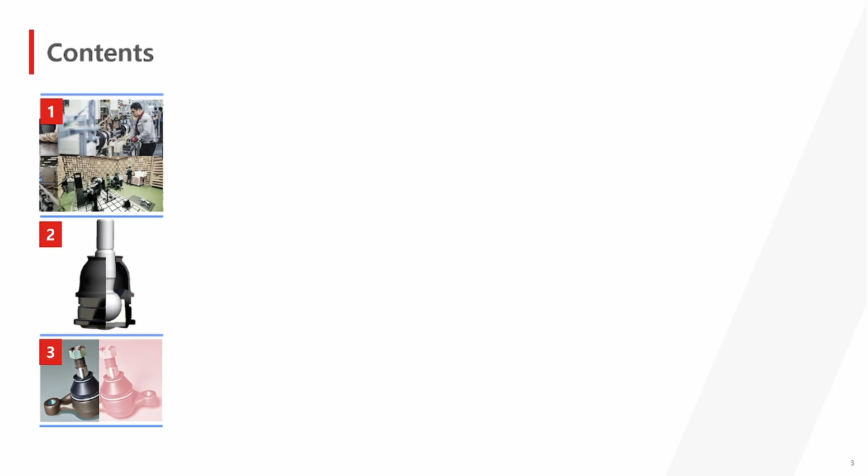Here is a summary of the main topics. First, I will tell you about the CTR aftermarket R&D development capability. Second, I will share CTR aftermarket product features and know-how. And I will share results comparing with competitor products.

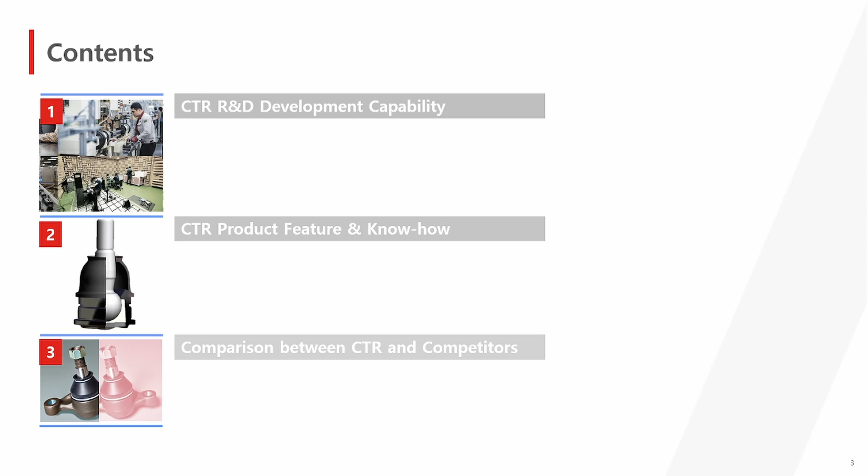Are you ready to begin? Then let's start the first tech seminar in Oman. First is CTR aftermarket R&D development capability.

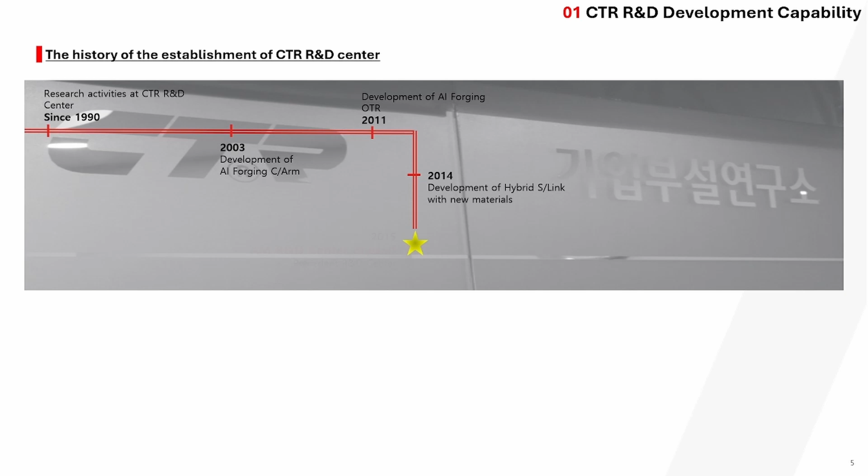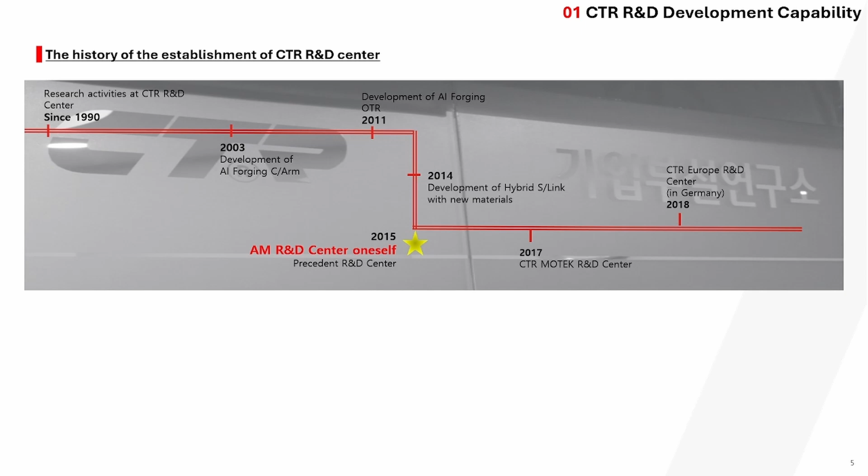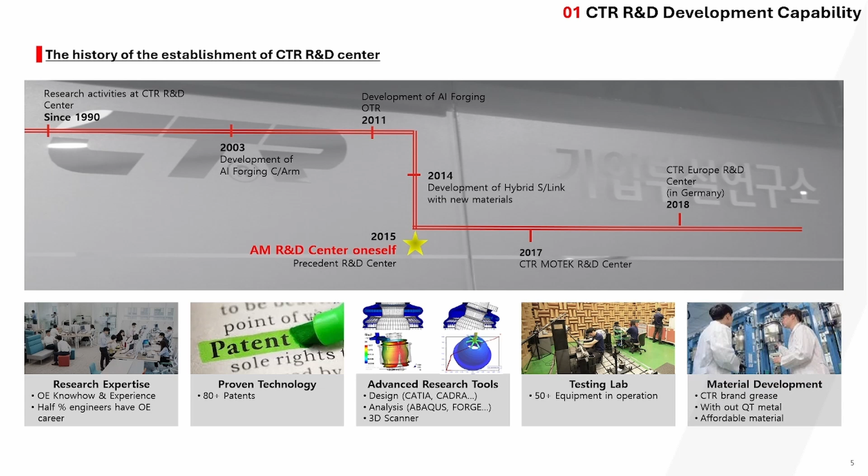CTR started with research activities in the CTR R&D Center since 1990. We have achieved some important technology developments. And since the establishment of the R&D Center for the Aftermarket in 2015, we have been training specialized professionals for the aftermarket. In the aftermarket R&D Center, we possess research expertise, proven technology, advanced research tools, a test lab, and material development capability. In the aftermarket, CTR stands alone as the world's sole company with such R&D capability and advanced technology.

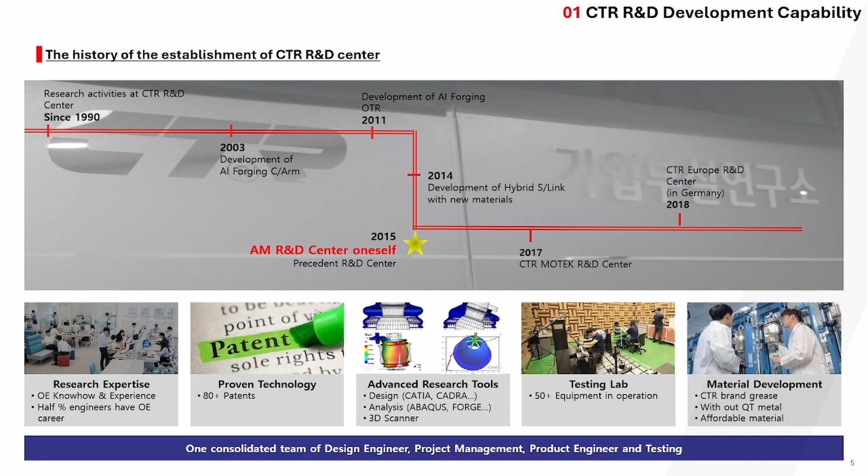Now let's discuss how CTR develops products. Basically, our development process aligns with OE principles, which means we are prioritizing affordability, quality, and reliable delivery. In the kickoff stage, we carefully plan our development schedule, conduct VIO analysis, and extend this approach from design and testing to production and sales.

Moving on to the design path, in this stage we select materials that suit vehicle and road conditions, and fine-tune dimensions using 3D modeling and FE analysis. In the analysis path, we perform cost analysis after design completion and ensure design specifications align with the OEM criteria through testing.

For fabrication, production lead time is: ball joint 110 days, outer tie rod 100 days, inner tie rod 70 days, and stabilizer link 70 days.

When it comes to the uploading path, we input the output into the system once production is finished, including APQP output, new item list, catalog, and newsletter. Our professional and detailed development process proves why CTR products are trusted by our global customers.

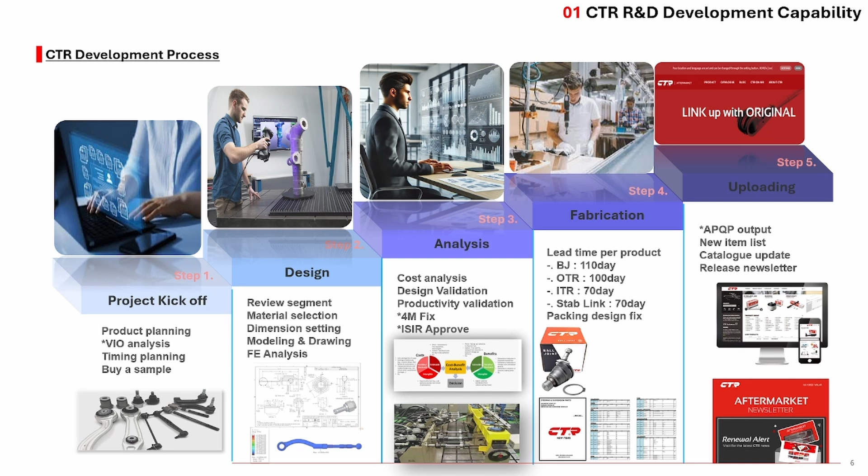Now let's take a look at how we design our products. Unlike our competitors, we don't just copy genuine parts. We review static and fatigue load cases, test specifications, operation angles, target mass, and package interface.

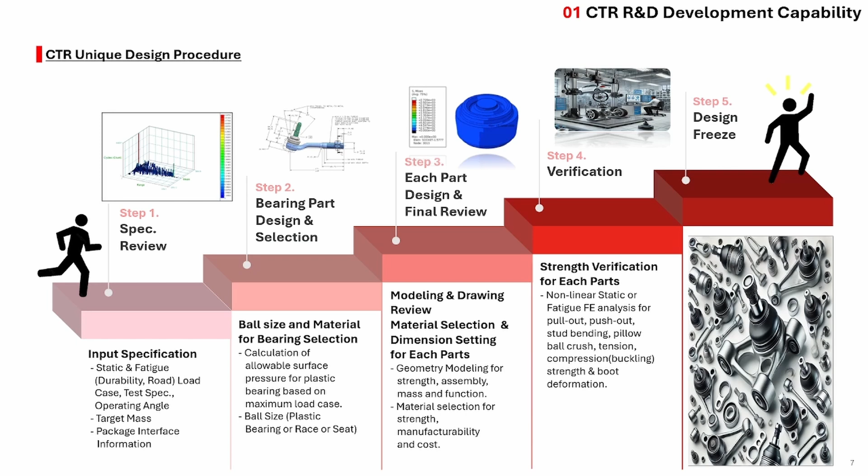Following this, we carefully select ball bearing materials and ball size based on allowed surface pressure calculation. We then set fixed material and dimension for all components. To ensure confidence in our choice, we conduct FE calculation analysis. If the result meets our standard, we finalize and freeze the design. If any aspect falls short, we revisit and make the necessary adjustment.

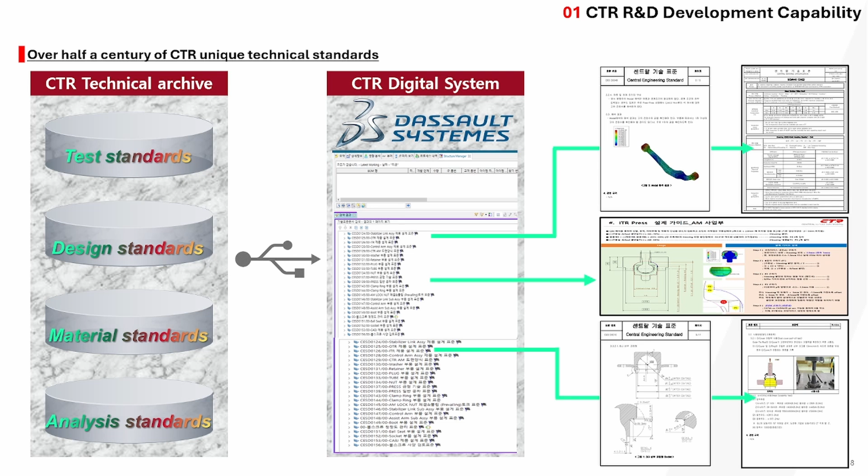The next topic is CTR's unique technical standard that spans over half a century. We store all of our analysis standards, material standards, design standards, and test standards in a digital archive. This digital archive is known as the PLM system, where all records are carefully organized, managed, and fortified with robust security features.

Second content is CTR product features and know-how. In 1886, Carl Benz from Germany invented the first automobile powered by a gasoline internal combustion engine. Carl Benz's automobile is considered a precursor to the modern car. From the 1920s, cars with suspension began to be made gradually to meet the demand of consumers seeking more convenience.

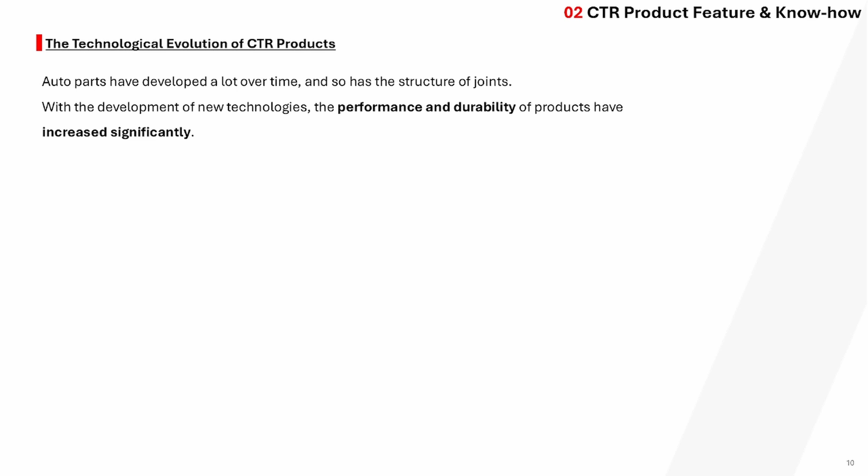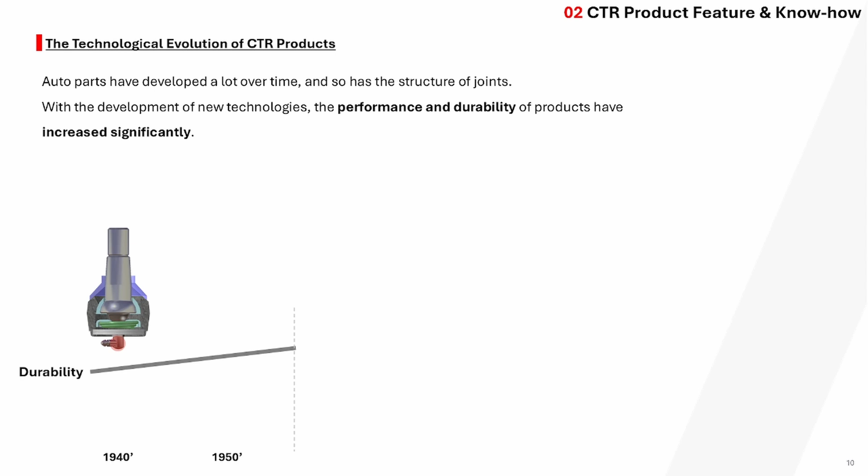In the 1940s, when suspensions started to be commercialized, they were developed with specifications that required grease injection. These products did not consider ride comfort or vibration at all because they contained a steel seat inside the ball joint.

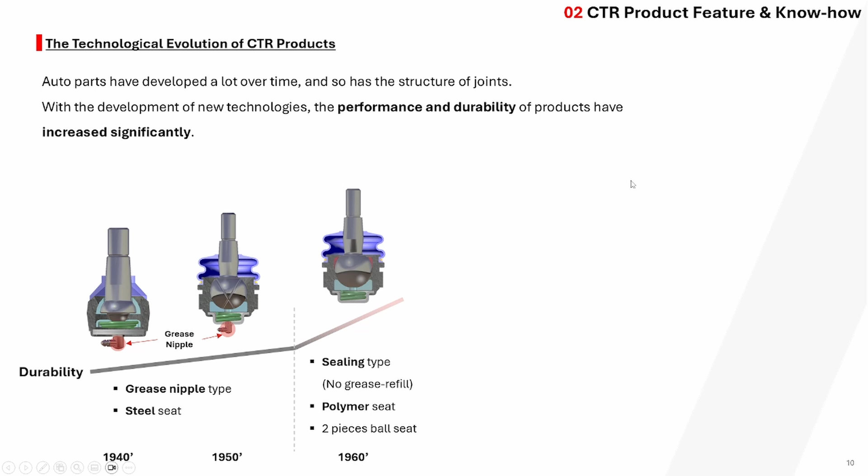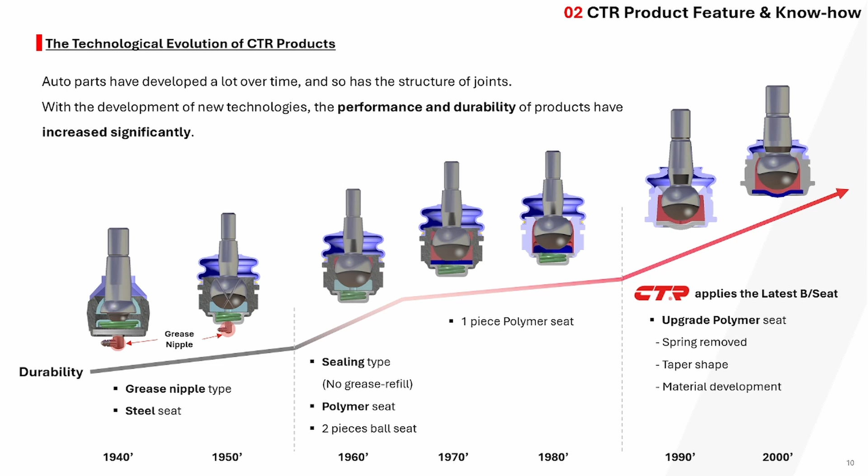At the time, cars were made solely of steel without using any aluminum or plastic. With the advancement of plastic injection technology, it became possible to mold a desired shape. As a result, plastic seats were applied inside the ball joint, enhancing torque, vibration, and durability, which allowed for the removal of the grease nipple. Currently, CTR has applied the latest technology, specifications, and materials to the ball seat in the ball joint.

Today, we will reveal all the differences between CTR products and those of our competitors. The materials used for all the components in the production of our ball joints and outer tie rods are identical to those used in OE products, and our design expertise is also the same.

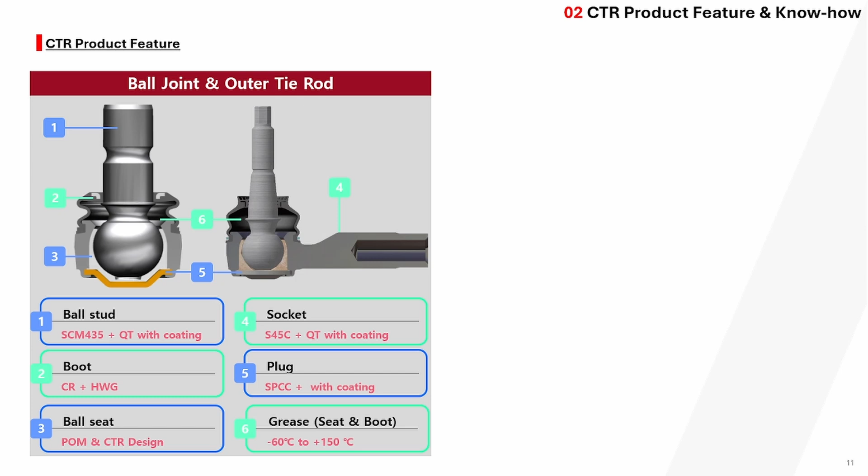The ball stud, boot, ball seat, socket, plug, and grease are all made from the same material as those used by the OE division. CTR uses the cold forming method to produce the housing of inner tie rods.

Generally, aftermarket suppliers apply the hot forming method or simply add heat treatment to round bar materials to reduce production cost. However, CTR produces the inner tie rod housing using the cold forming method because it is critical to drive safety and has a direct impact on product quality.

If the thread of the housing breaks, it can lead to loss of control of the vehicle. Additionally, CTR designs its product identically to OEM parts to ensure easy assembly with the counterpart component.

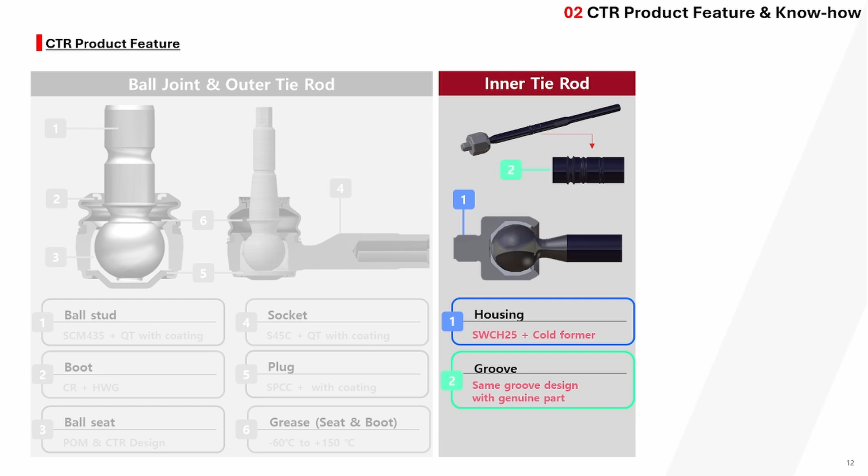CTR offers four excellent types of stabilizer link: A and B type, price competitive with superior performance; C type, suitable for SUV or large vehicle; hybrid type, specialized for luxury sedan with excellent durability; U type, scheduled for release at the end of year, offering price competitiveness similar to A and B types with superior strength.

All steering and suspension products from CTR use the specialized grease developed exclusively by CTR for automotive ball joints. CTR grease is the same as the grease supplied to global automakers and is protected by a development patent.

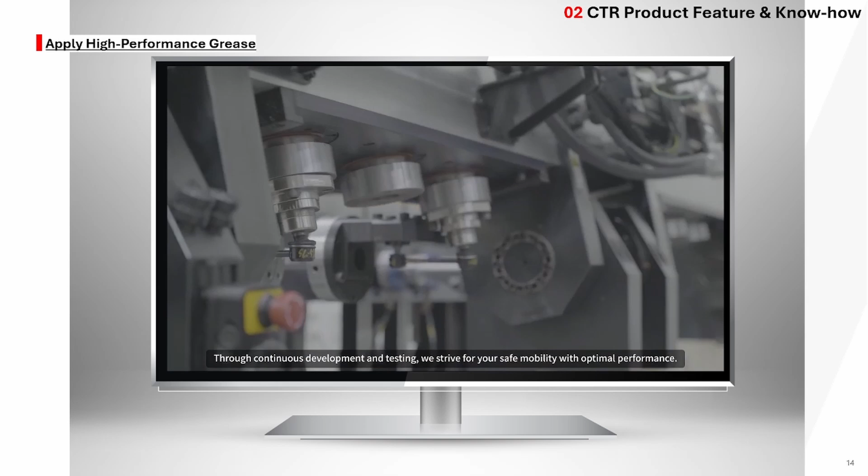CTR production philosophy is zero defect. We share our production system and experience with the OE division to provide our customers with the highest quality product. Our production process is divided into three key themes.

First, component loading. All components undergo rigorous measurement and vision inspection before proceeding to the assembly stage. Second, sub-assembly and caulking. This crucial stage determines the installation accuracy and performance of the product.

Finally, boot assembly and package. The production is finalized with the boot assembly and then carefully packaged in a dedicated box.

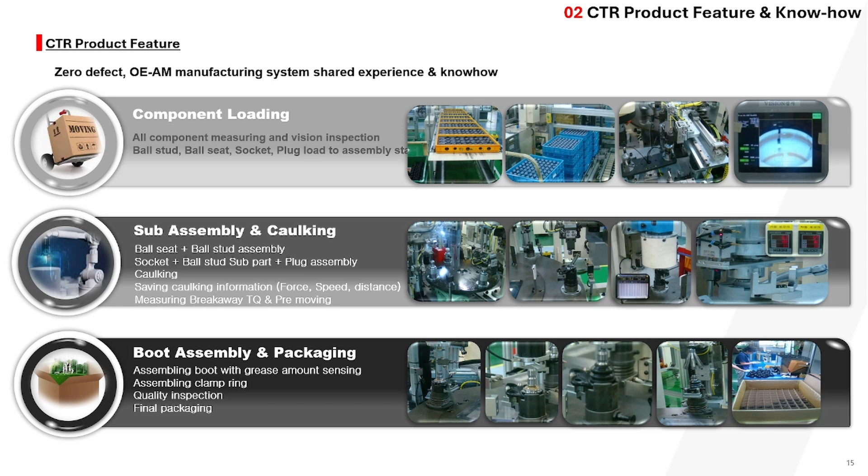To ensure that we deliver a product our customer can trust, we have automated most of our process and include a 100% inspection process to prevent any defective product from reaching the market.

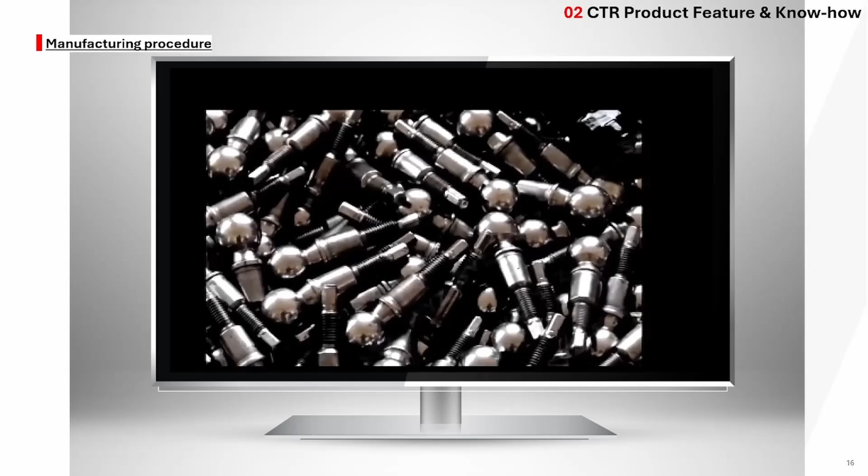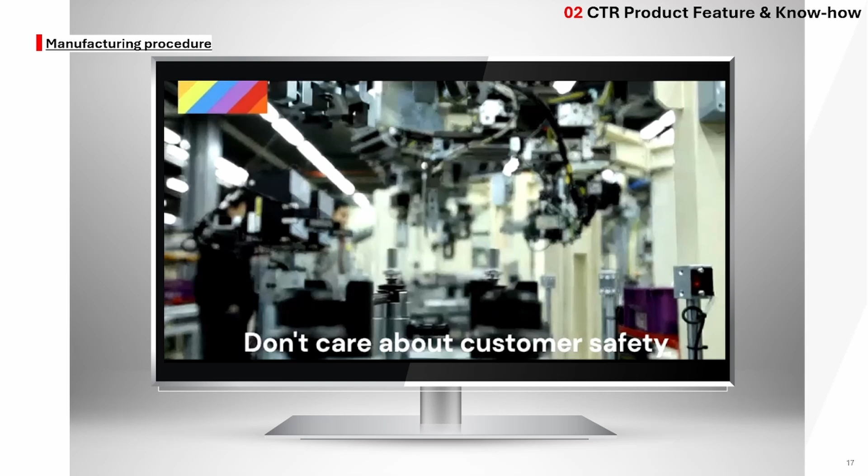Is this level of technology common? The video we are about to show demonstrates the standard of some companies you may have encountered or might encounter in the future. We ask for your understanding as we cannot disclose the name of the company in the video. Now let's watch the video on CTR assembly process and technology level. Please observe the difference.

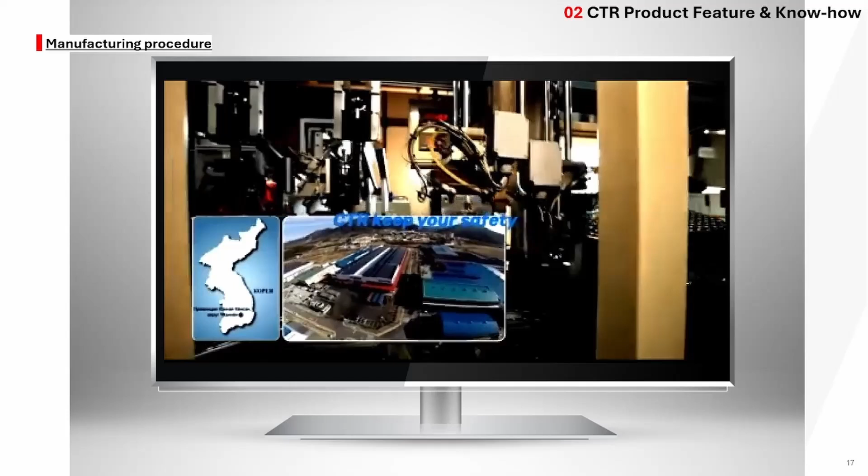Finally, we reach the last part. This content is a comparison between CTR and competitors.

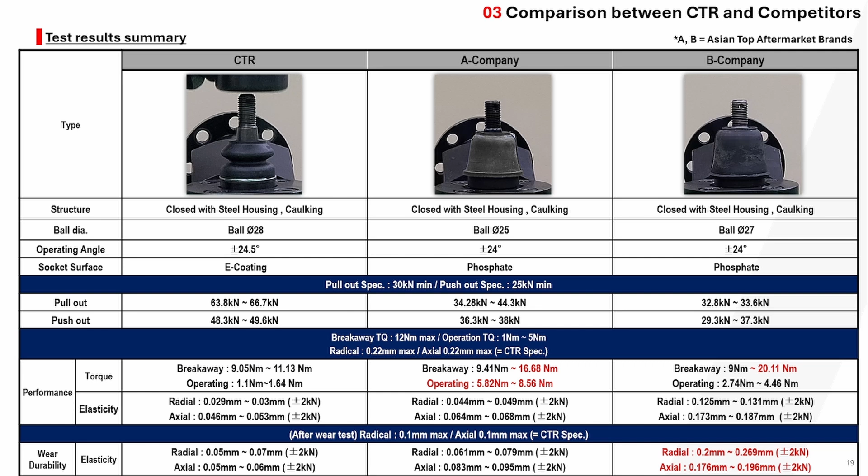The function of a ball joint boot is to protect the ball joint from dirt, particles, and moisture, ensuring the longevity and proper operation of a ball joint by maintaining lubrication and preventing contamination in the initial state of the product. We do not anticipate any issue with the boot.

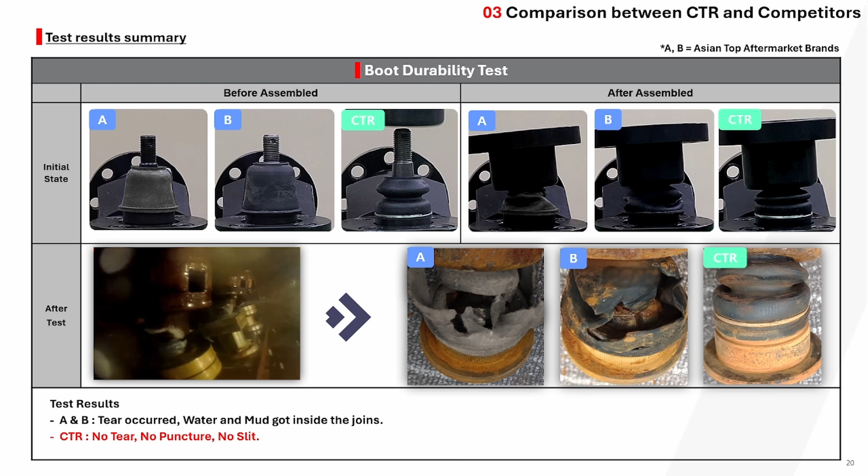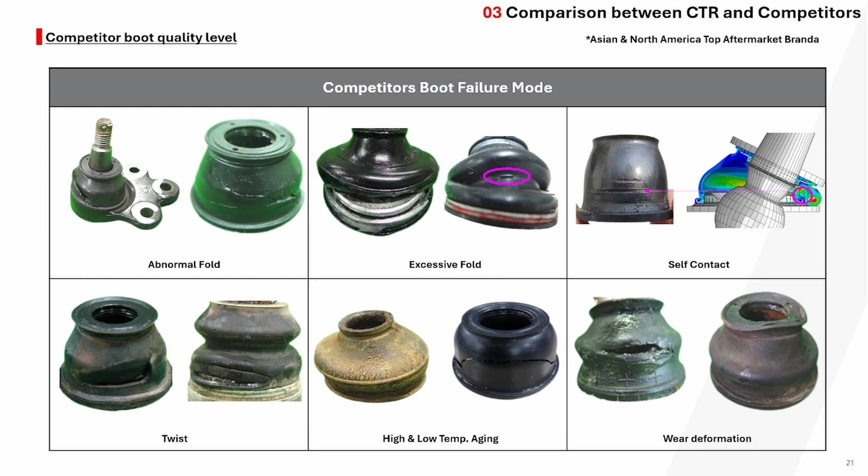To ensure the quality of our boots, CTR undergoes four strict verification processes. First, boot FEA.

We use this analysis to predict and address potential issues such as excessive fold, twist, gap, and self-contact, pioneering designs accordingly. Second, boot durability test.

Once the product is completed, we conduct a durability test to confirm the boot's long-term performance under various conditions. Third, high pressure leakage test.

To ensure the boot can withstand the water pressure from the high pressure hose used during car washing, we perform the high pressure leakage test. Fourth, sealing ability, seal twisting, and low temperature oscillation test.

These additional tests verify the boot's durability and performance, ensuring that it meets the highest standard of quality. By implementing this comprehensive testing, CTR guarantees the superior quality and reliability of our boot.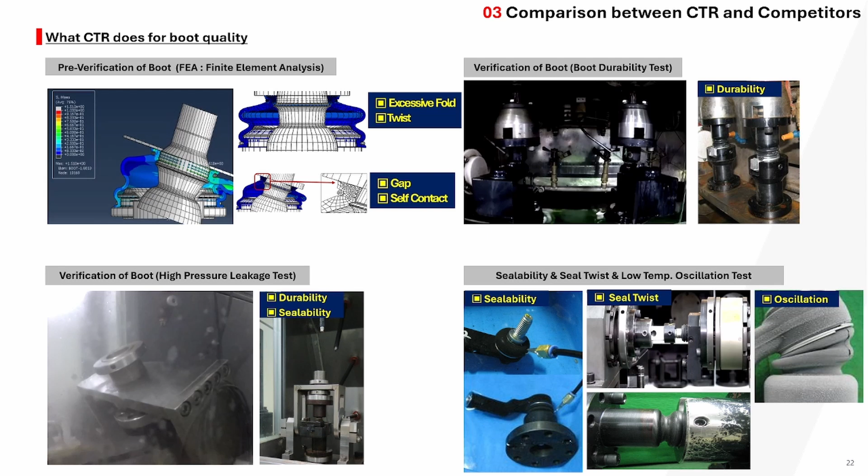Not only do we take various tests, but only the parts that pass all tests can be used when we develop the item. The surface treatment of a ball joint plays a crucial role in ensuring its performance and longevity.

Here are the key functions of surface treatment: first, corrosion resistance; second, wear resistance; third, improved lubrication; fourth, enhanced strength; fifth, aesthetic appeal.

This test is a corrosion resistance test. It compresses the natural condition experienced over 10 years into an accelerated evaluation. The test was conducted using equipment and methods required by automotive customers. The results show that all competitor products exhibit rust after 48 hours, however CTR products show no sign of rust up to 240 hours.

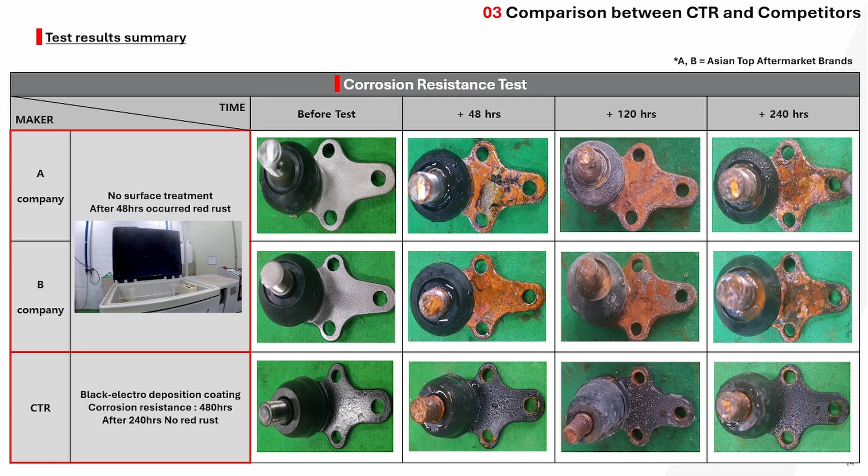Have you ever seen a product with the same packaging and brand logo as CTR, but with a strangely low price and somehow reduced performance or functionality? In the past, there were businesses copying the CTR brand. However, recently many countries have seen products that copy not only the packaging but also the exact design of CTR products being distributed in the market. Some customers knowingly use these fake products. The following material will explain the danger of using fake products.

This test is a wear durability test for ball joints. The purpose of this test is to determine how long a ball joint can withstand actual driving conditions, and to show its performance and quality after the driving test.

The test conditions are based on the ball joint wear durability test standard. Axial and radial loads of plus minus 0.63 kN and plus minus 4.45 kN are applied. The load application speed is 8.3 Hz, and the total number of load applications is repeated 1 million times. During load application, the stud rotates plus minus 28 degrees and oscillates plus minus 15 degrees.

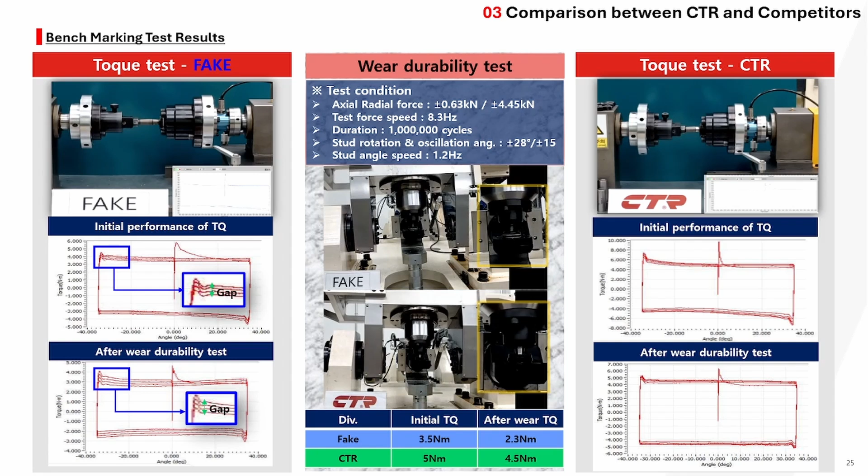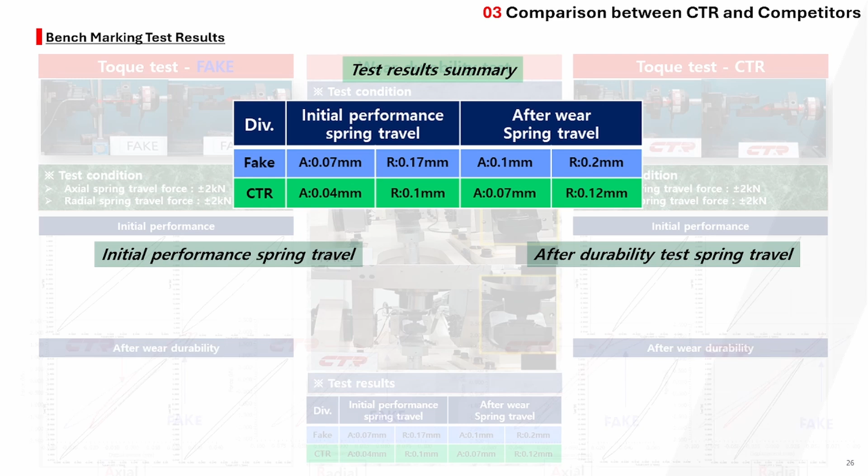In the spring travel test result, it was observed that the fake product deformed approximately twice as much as the CTR product.

The wear durability test evaluates product durability, while the fatigue test is a critical evaluation directly related to product lifespan and safety. The load applied in the test corresponds to the particular life load for a specific vehicle model, and the required cycles are 10,000 cycles.

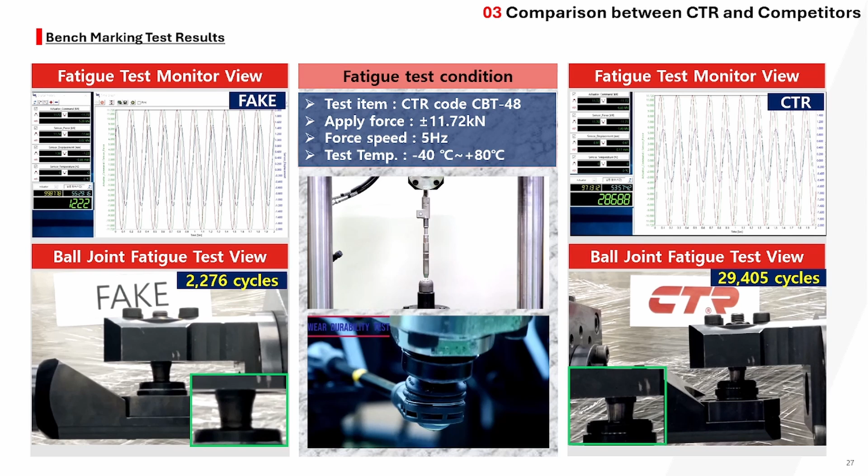In the test result, the fake product's bolster fractured at 2,276 cycles, whereas the CTR product's bolster fractured at 29,405 cycles. This demonstrates that CTR products have more than 10 times the fatigue lifespan compared to the fake products.

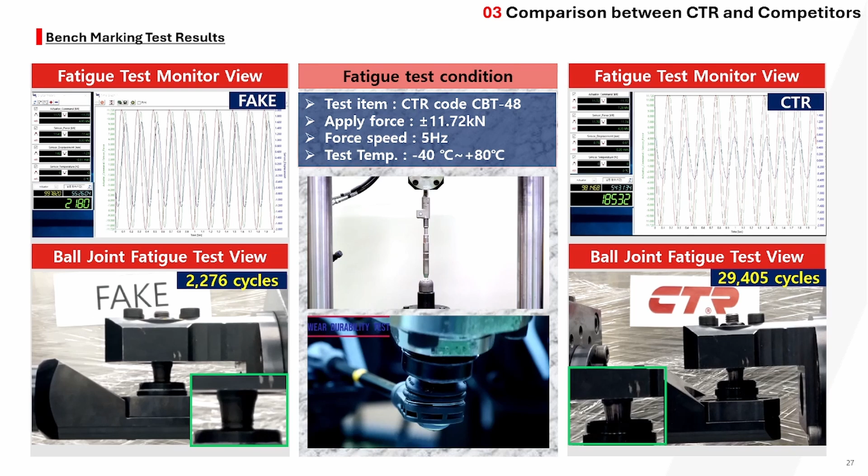Now let me explain the reason for this significant difference. We analyzed specimens after the fatigue test. The fake products show ferrite and pearlite structure, indicating absence of quenching and tempering heat treatment. In contrast, the CTR product exhibits martensite structure, which is present due to proper QT heat treatment. Martensite structure is superior in fatigue life and strength, and it is a mandatory requirement by all automotive customers worldwide.

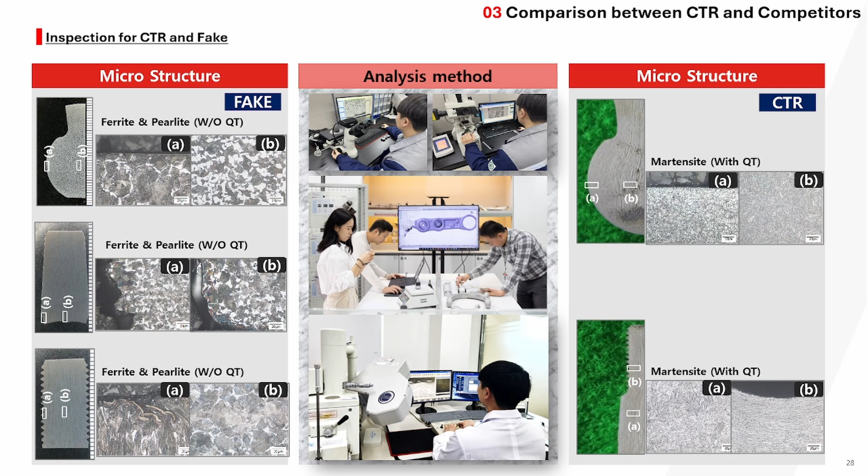The hardness of metal is one of the crucial indicators for evaluating the mechanical properties of metallic materials. Hardness refers to the metal's ability to resist localized deformation under applied load. Metal with higher hardness typically exhibits greater fatigue strength, as it possesses superior resistance to localized deformation. However, excessively high hardness can increase the brittleness of the metallic core, potentially reducing fatigue life. Therefore, it is essential to establish both upper and lower hardness limits.

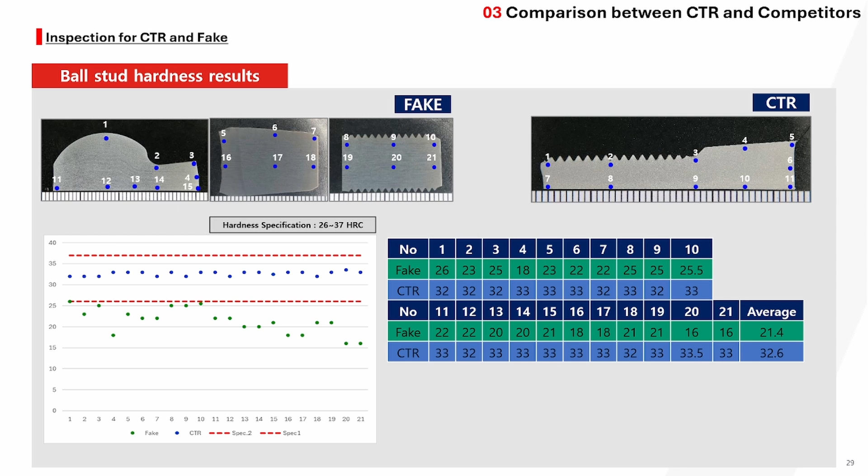CTR's hardness management standard is set between 26 to 37 HRC, aligning with global automotive requirements. While the hardness measurement of the fake product falls short of the specified range, CTR products continue to meet this uniform hardness value. The summary of material analysis results for CTR and fake products is as follows.

The fake product's ball stud lacks heat treatment. The fake product's socket also lacks heat treatment. Additionally, the boot and seat grease used in the fake products are industrial grade.

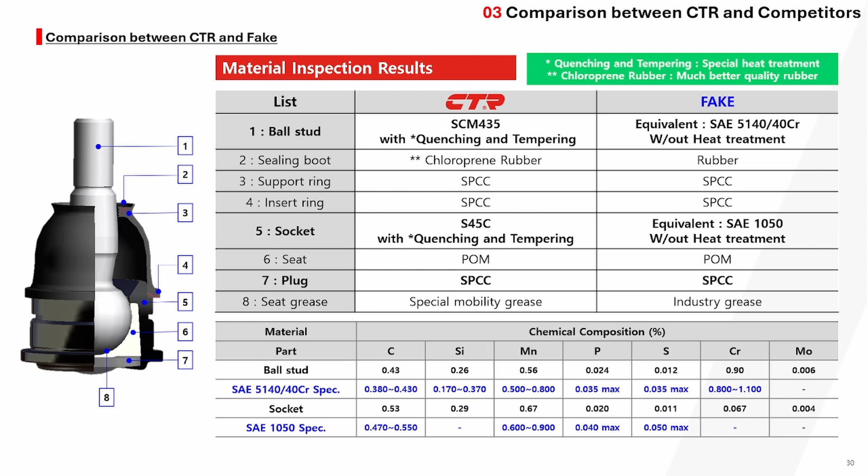There are also significant differences in the exterior appearance of the ball joint. The E-1 dimension refers to the ball stud's taper angle, which is crucial as it affects assembly with the mating knuckle. CTR's ball stud has the same taper angle as the original equipment manufacturer (OEM) parts. However, the fake product's ball stud has a different taper angle compared to the OEM parts.

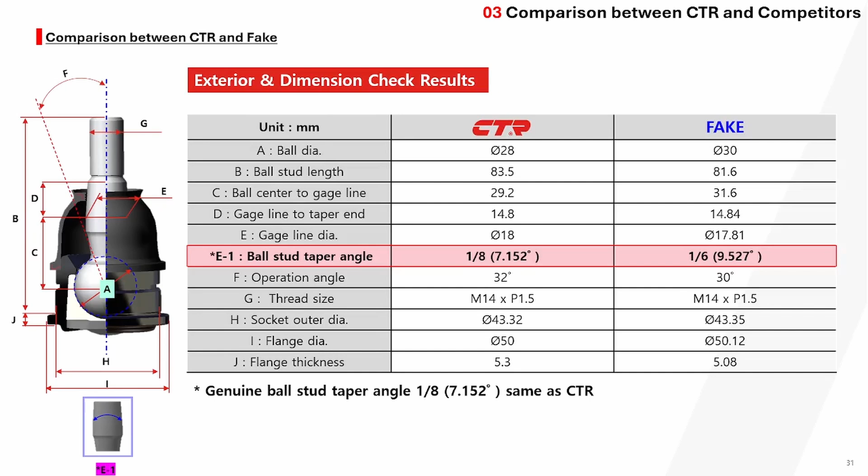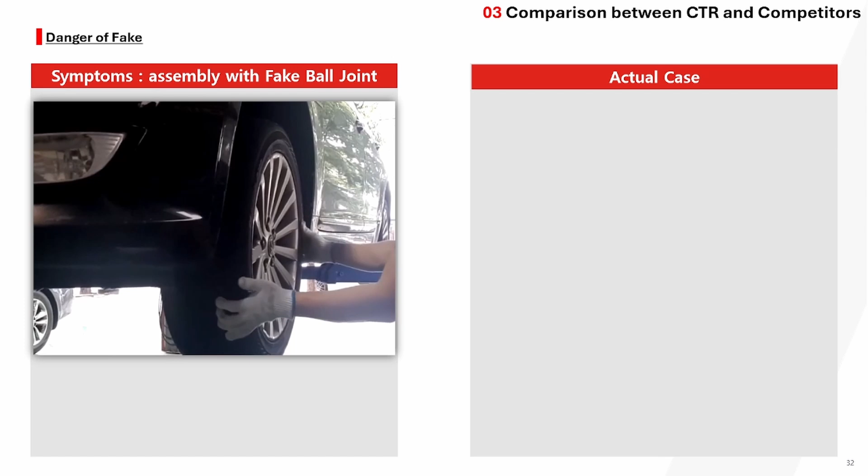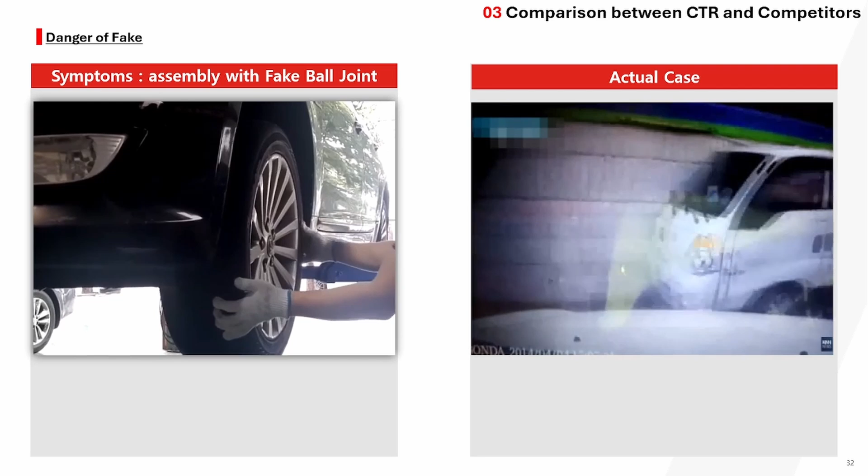When a fake ball joint is assembled, it causes the tire to wobble severely, as shown in the video. During driving, the play between the ball joint and knuckle leads to partial failure of the ball joint stud, resulting in loss of steering control and potentially causing an accident, as depicted in the video.

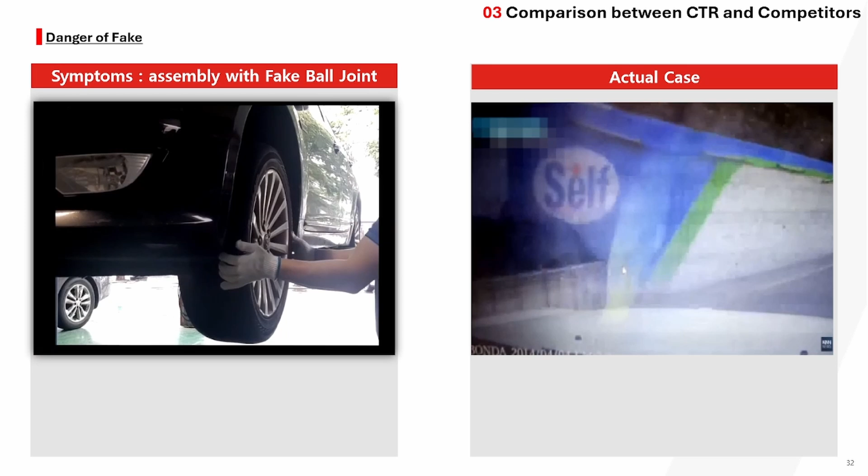What do you think? Fake products are cheaper than CTR products, but are they worth more than the safety of you and your family? CTR prioritizes customer safety above all else.